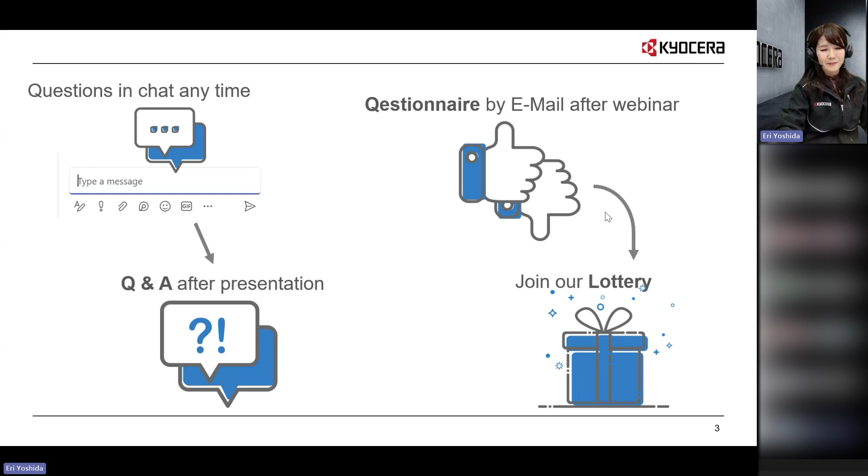Thanks, Eri, for the introduction. Welcome to today's webinar. As Eri clearly mentioned, we would like to talk about drilling today, and in this specific application, I will introduce steel beam machining. But before I start, I would like to give you a short overview of our DRA series in general to see our performance in our lineups.

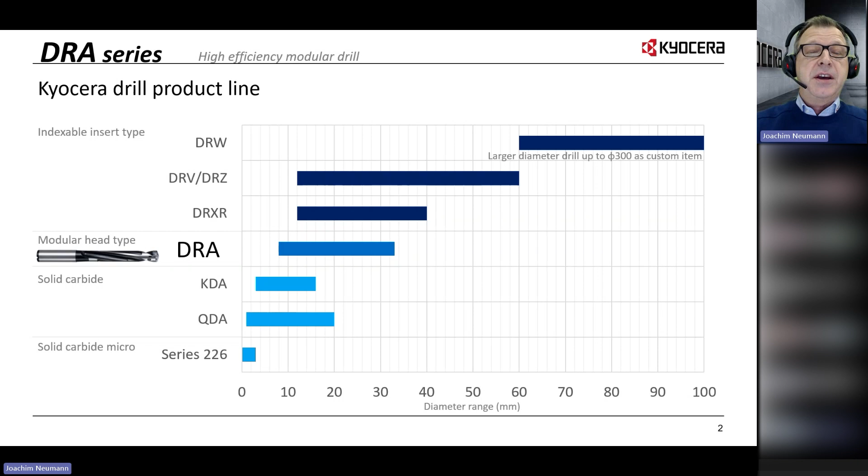As you can see on that slide, we have a huge lineup related to drilling products. Today I would like to focus on the modular head type, which is our DRA. The DRA is taken care of with a throwaway insert. If we talk about the DRA, we are talking about high precision hole making due to the exchangeable tips. It's a modular head type insert, so-called, using a screw clamp system. Some of you may already know our DRC type, which is a self-clamping system.

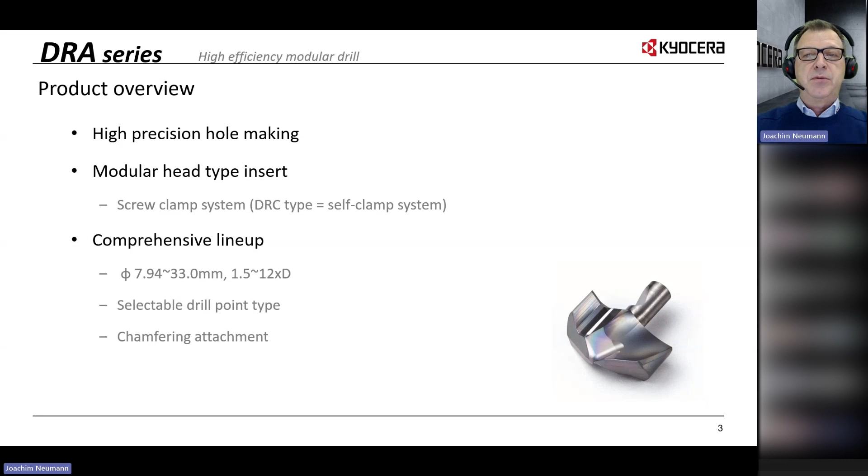At least we have a comprehensive lineup, starting from diameter 7.94 up to diameter 33, and the tool holder itself has a lineup from 1.5 times D to 12 times D. We can select different types of heads, which I will show you in a later overview. And of course there's a chamfering attachment available for a one-shot solution, drilling and chamfering in one shot.

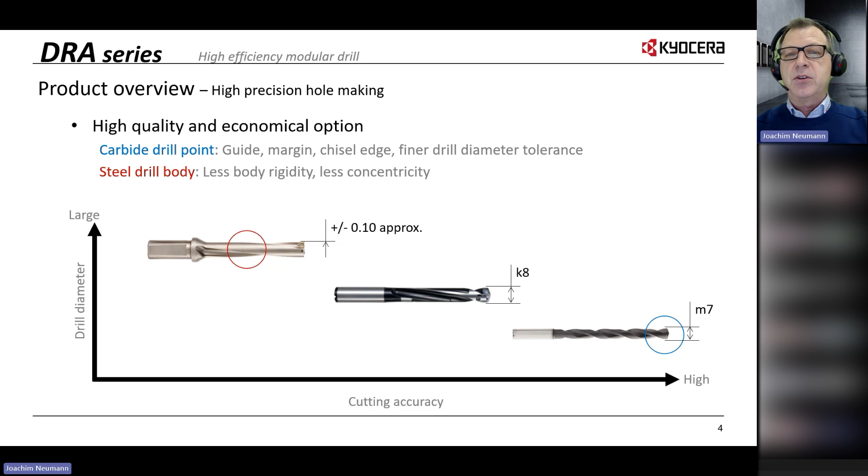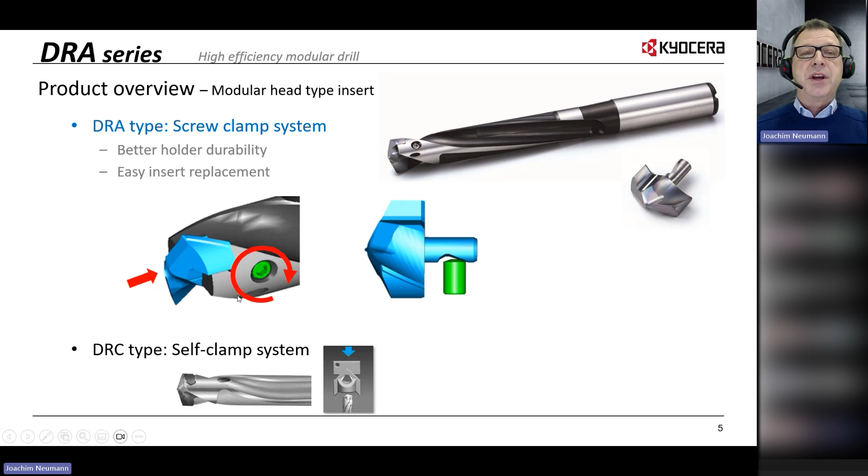Let's go a little deeper into the features of the DRA type. As I tried to explain, this is a screw clamp system, shown here on that slide. Therefore we can expect better tool holder durability, meaning the strength is better, and the tool life becomes longer compared to the former system using the self-clamping system, shown on the bottom side of the picture. And of course it's easy to replace the insert—just untighten the screw, remove the tip, install the new tip, and tighten the screw, and that's it.

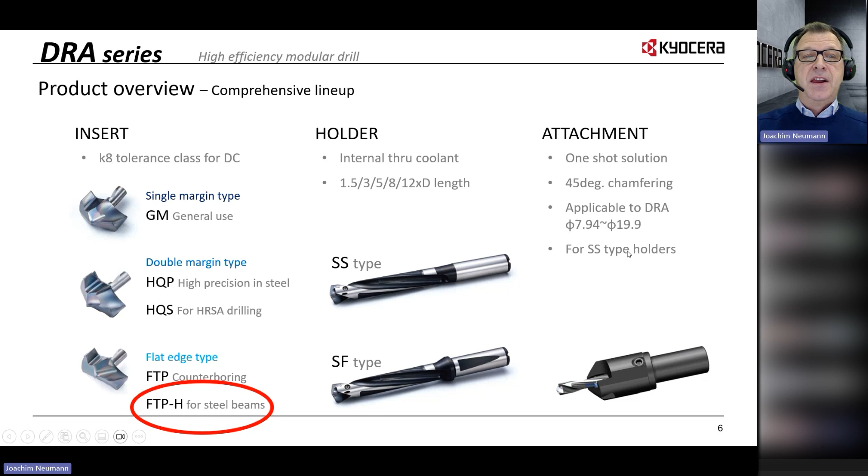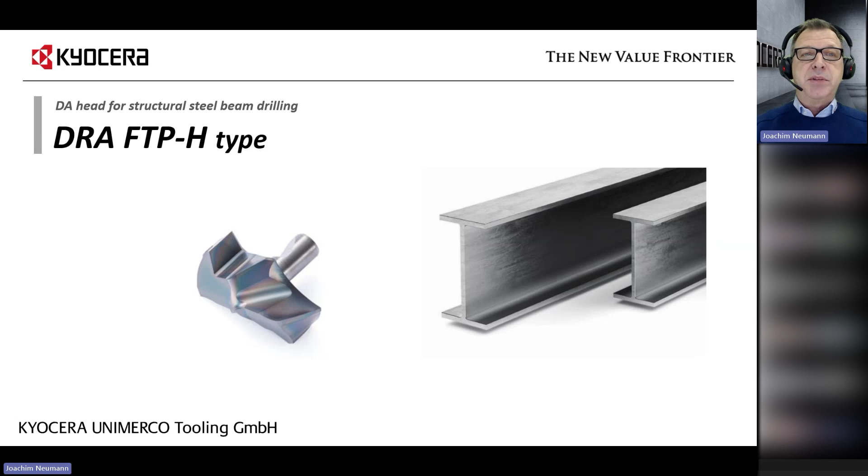So let's go into the FTPH for steel beam machining. This is a specific tip which we developed for a specific market, the so-called structural steel beam drilling. This is a totally new business which we can enter with that kind of application by using our DRA FTPH type. I will explain some more details related to the FTPH type in this presentation today.

Before I start with the features of the FTPH, just some general words about steel beam drilling. If we look at the pictures, you can see it's not a typical situation which we know from our machining centers, which we are normally in front of. So it's a totally different situation.

From the point of materials, these are normally plates, or you have construction steels, the steel beams in T-type or H-type design, and these are normally from sticky material as it is construction steel. So the material shape is mostly plate or square pipe. And of course, the depth of hole is normally not so deep—around 15, 20, or sometimes 40 millimeters.

So normally we can use 3 times D drills, but due to some specific clamping situations, we sometimes need 5 times D drills as well. On the right side, on top, you can see the picture of the chips—longer chips which are hardly evacuated cause recuts. This means the drill will bite again into the chips; it's so-called chip biting, which is a little bit difficult.

As you can see, maybe on the next picture, there are some dedicated machines—gantry machines specialized for these kinds of industry. Normally we have a low rigid clamping situation, or sometimes you find no clamping at all, meaning the workpiece itself just stays in position due to its weight.

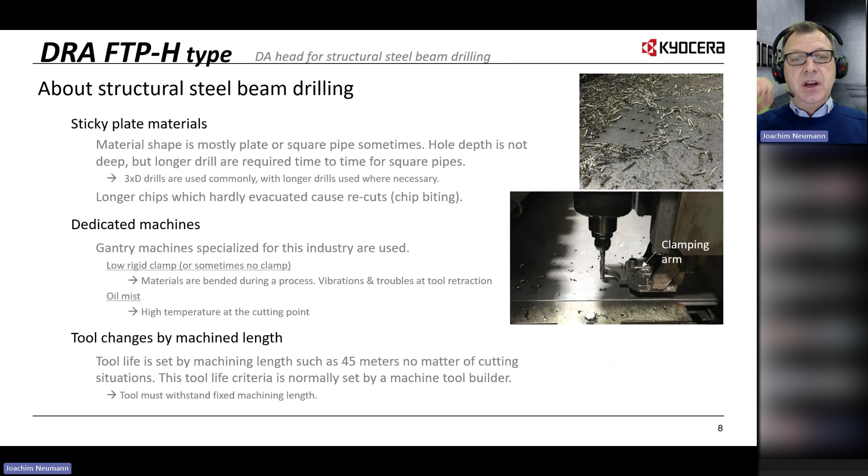So let's go into the information about which kind of machines we can expect for that kind of business. As I tried to explain, this is a totally new business which we can enter—not an ordinary general shop floor. We can find these machines in steel beam machining, for the construction of shop halls or whatever, as we will see on the next page.

Here we're talking about specific machines like FICEP, like the CMA, or on the right side, the Peddinghaus machines, Voortman—well known in the Netherlands—or Kaltenbach from Germany as well. These are specific machines, and as you can see, the shape is totally different compared to the machining centers which we know.

At least there's a machine which is mainly taking care of cut-off, for cutting the steel beams, and then we can find, for example, some additional drill units which take care of hole making or tapping as well.

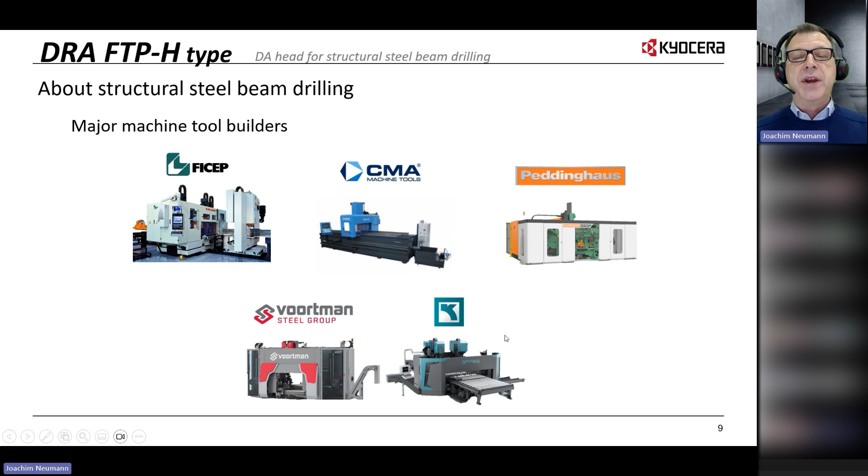So the parts which should be machined on that kind of machines are just an overview here in these pictures—it's in the steel hall structure, we can find that. If you look into your shops, or if you are in front of sales or application and go to the customers, you can find the typical steel hall structures, just open your eyes. This is our business for the FTPH steel beam tip, this kind of business we would like to enter with our new FTPH drill tip insert for the DRA.

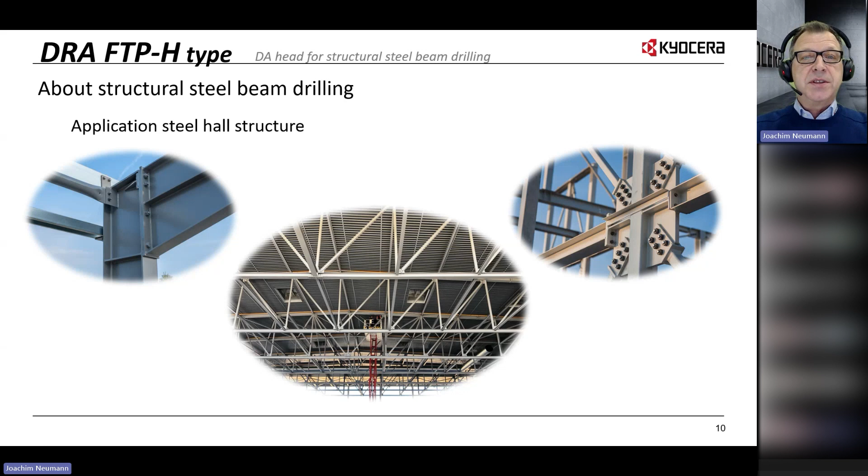For that, of course, we need some specific product features and benefits. At least it's a reinforced geometry, so therefore we expect good and stable tool life. You can see on the picture on the right side that we have a specific chamfer—even the chisel is a specific chisel to get good centering. And one important thing is the 70-degree back cut.

It's shown here, so then we have less trouble if we retract the tool. Maybe there is some deflection from the point of the workpiece, or maybe some other situations where we have deflections, and due to the chamfer, there's an easy retract action given for the drill spindle. So though we do not expect any damages on the tip himself.

And of course, for the cylindricity and for good support, we are using a double margin. And as you see on the picture, it's a 180-degree edge angle. So therefore, we can expect, due to our design, short chips. It will be shown later, you can see that in some nice videos.

But especially here, as we are using 180-degree compared to the conventional 140-degree drill tips, we can save time as the travel distance becomes shorter than the conventional tools. So here is a big impact for increasing productivity for the steel beam application itself, as we have less travel distance compared to the existing systems in the market.

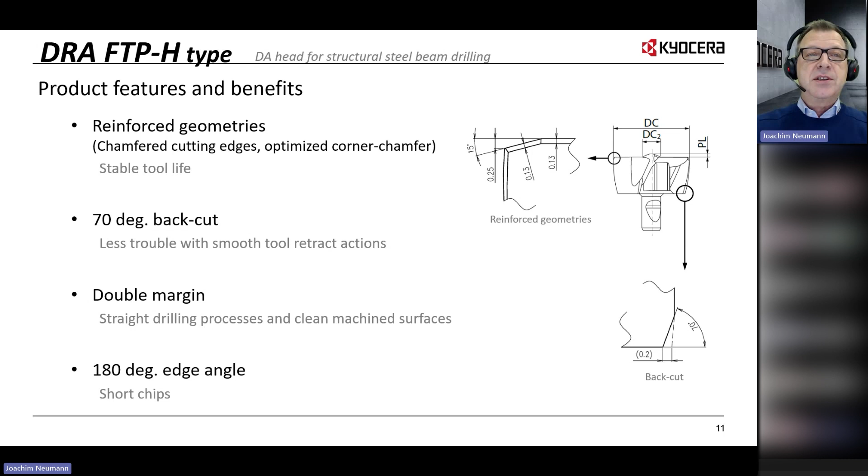So these are the features of the DA tip, and just how they are working, I would like to underline on the next slides. Here we can see some cutting data which we evaluated, and we would like to simulate an interrupted cut. So if you look at the picture on the right side, we are drilling a hole into an existing through hole to give a situation like an interrupted cut.

And if we look at the pictures, you can see that we expect shorter chips on the left-hand side. This is our DRA, so-called DA tip, in diameter 26 with our FTPH. We are using our PR1535 grade, which is the first recommendation for that application. And of course, it's a through hole in construction steel, which is ST52.

And we are using, close to our recommendations, 80 meter cutting speed with a feed rate of 0.2, at a depth of 25 millimeters. And in this case we used internal through-air cooling, and we made 12 holes. You can see clearly the differences against our competitors, which we can find in that market.

The chip shape is totally different. Shorter chips are expected. And if we look at the surface of the hole itself, you can see that our competitors are creating chattering marks, which come from the different rigidity of the tool holder itself, and of course the design of the tip.

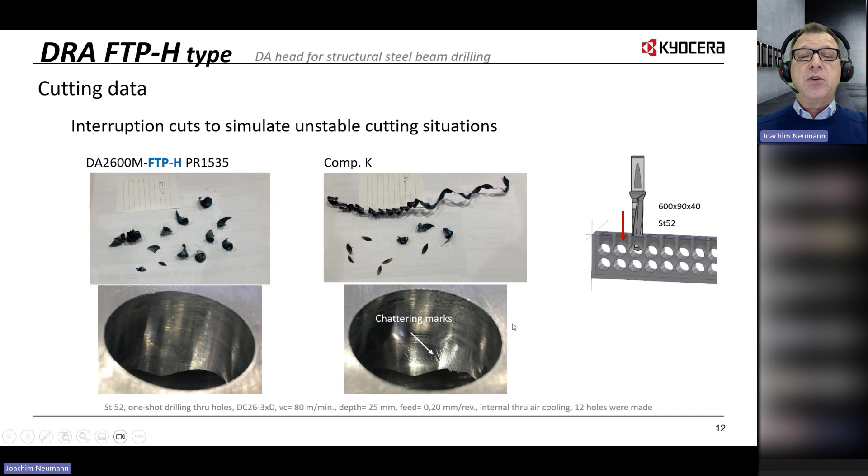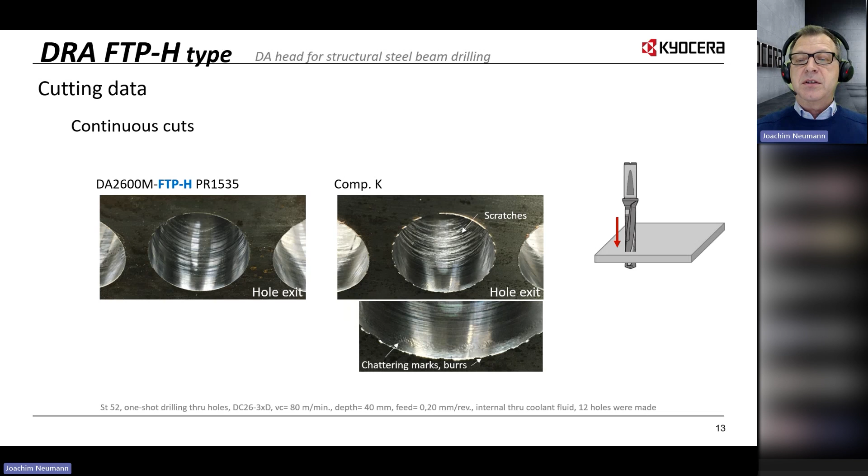So of course, if you would like to utilize our DRA with DA tip FTPH, you need some information on how it should be used. So therefore, you can find here our recommended cutting conditions. The lineup is close to the information which you can find here on this picture.

From diameter 14 to diameter 26, we are always using this as our starting recommendation with a cutting speed of 90 meters per minute. And of course, the feed rates, depending on the diameter, start from 0.18 up to 0.22.

If you're drilling thinner plates, which are more unstable, please reduce the feed rates in this case. Or if you have support by oil mist, the quantity differs from machine to machine, so even here you can check the color of the chips to see if the cutting speed is right.

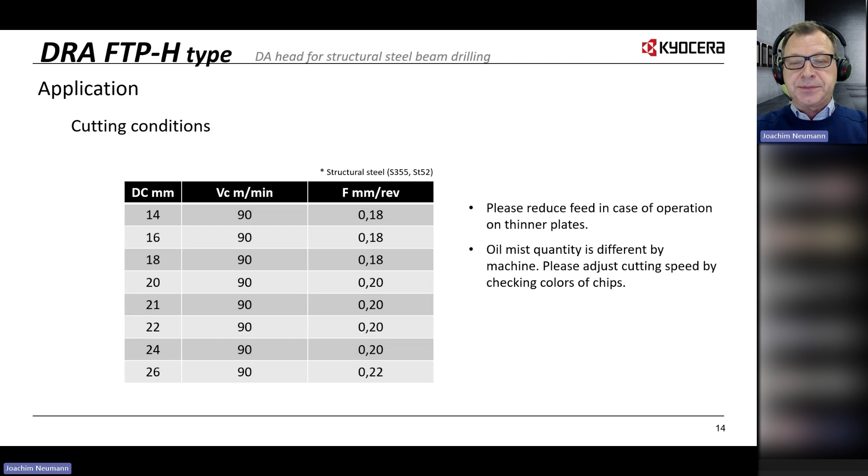So from the point of strategy of the DRA FTPH type, if you are a technical consultant, we would like to open now new business for you, as we have to open our eyes to get that new business, not just the standard customers which we support day by day. So this time we are looking on the right side and the left side to find these specific construction shops where we can find these specific machines, and here we should enter. And why should we do that? Because the performance of the DRA tip is really, really good.

As a technician, an application engineer or a well-skilled technician, you can give customers support which normally is not given to them by our competitors. So this is a good point for you to open new business.

In some cases, if we have unstable machining and we caused problems with our existing tips like GM or FTP due to pull-out, we can improve that with our FTP-H type as well. Or in cases of low rigid clamping, thin workpieces, large overhangs, we can switch from our standard geometries to the FTPH type.

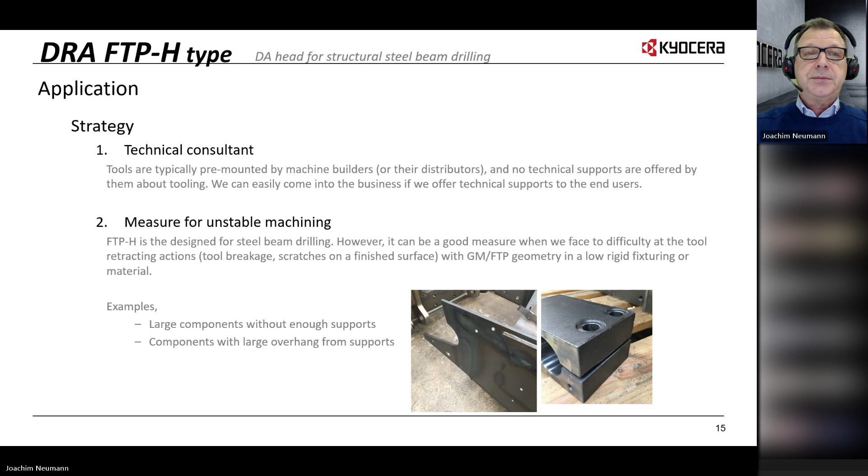To underline our good feeling about that product, I would like to support today's presentation with some nice videos, and I hope the sound is running as well.

This is a test trial done by one of our customers on a Kaltenbach machine. You can see the machine on the top right of the presentation slide. This is the machine where the DRA was used, and of course it was used against our competitors' products. In this case it was Ceratizit, or you can find the same product in the catalog from WNT.

You can see the performance of the chips in the picture here. FTPH in diameter 22, used with extensions at an overhang of 280 millimeters. It was S235 steel plate. Cutting speed in this case was 110 meters per minute, feed rate was 0.3 per revolution, at a depth of 20 millimeters in a dry condition.

So just have a look at that nice video. Okay, now it's working. Here it's quite easy to see the difference and to hear the difference.

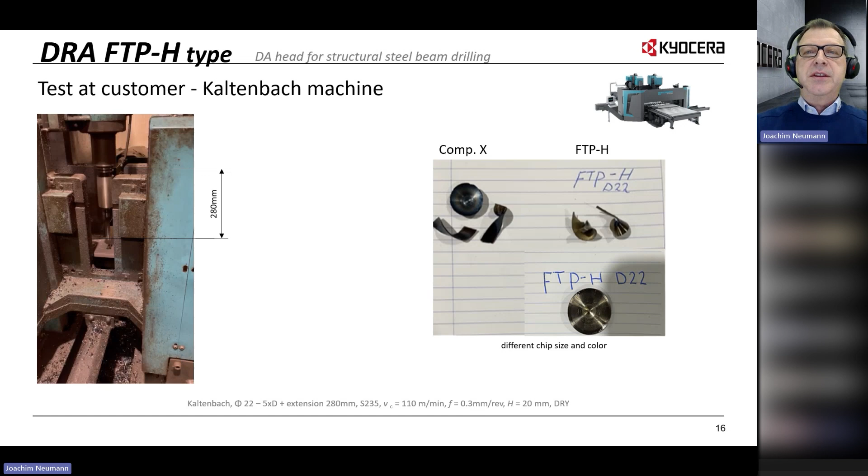I think it's quite easy to recognize that this business is totally different compared to our existing daily business. You can see from the point of positioning, clamping, and even the style of the machine it's totally different, but the performance of DRA with the FTP-H type is really good. Even with an overhang of 280 millimeters, it works perfectly, with really good chip control, and the customer was satisfied.

On the next slide, I would like to give you the opportunity to join the video which was done on a Peddinghaus machine. This is a specific machine designed just for that kind of business, for steel beams. Here we used a cutting speed of 55 meters per minute at diameter 22, a 5xD drill.

This time the workpiece is S355. The feed rate is 0.3 per revolution, and the depth of cut is 16 millimeters in a dry condition.

If you look at the right side picture, you can see the chips from our competitor's product, so-called competitor K - it's easy to imagine it could be Kennametal, the KenTip system - and you can see the chip shape is totally different. Of course, in this application the drill needs pecking cycles as well, meaning a short stop every 2.5 millimeters to break the chips, which you do not need for the FTPH. So even here, enjoy that nice video.

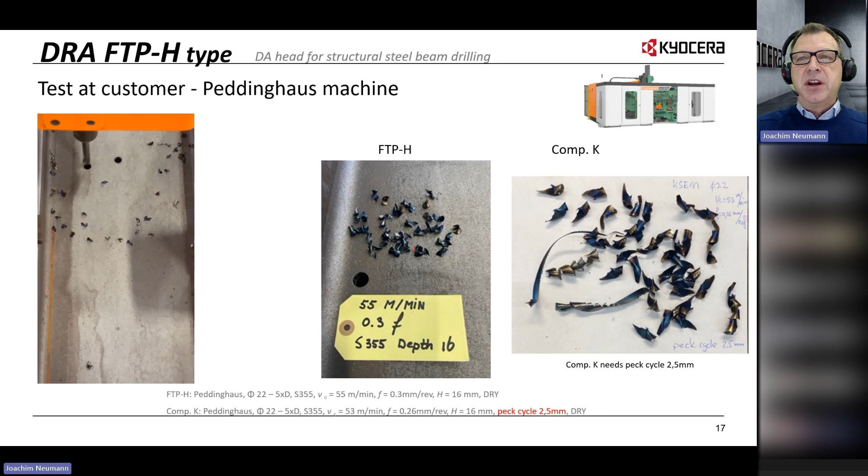On the next slide we will see a test from a customer on a FICEP machine. This is a big plate, which I think is used for bridge building, so it gets a lot of holes. Here it's a diameter 16 FTP-H type, and it's an S355 bis material.

We used a 90 meter cutting speed with a feed rate of 0.16, and the depth of cut was 15 millimeters in dry condition. The customer had previously used a standard Kennametal U-drill with inserts, so the cutting conditions are a little different compared to our DA tip.

For that comparison it was a 120 meter cutting speed with a feed rate of 0.04. Here we could improve productivity 3.4 times compared to the existing product from Kennametal. So even here, enjoy the video.

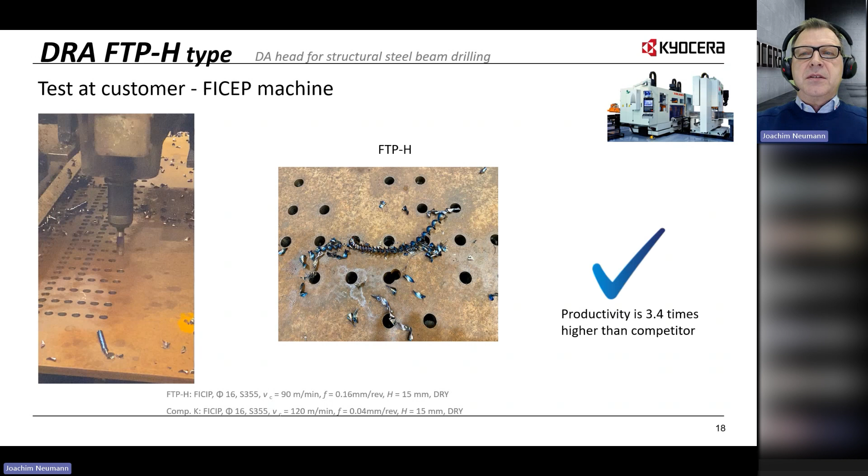So finally, the last video file, it's a test at the customer here. We would like to figure out the unstable fixture. The clamping situation is quite weak, but even here we received a really good result by using our FTPH from the point of chip control, tool life, and even from the workpiece point of view for the next step of machining. So we have less burr on the hole exit compared to the existing products. And here we used 80-meter cutting speed with a feed rate of 0.13 in an unstable clamping or fixture. Enjoy as well.

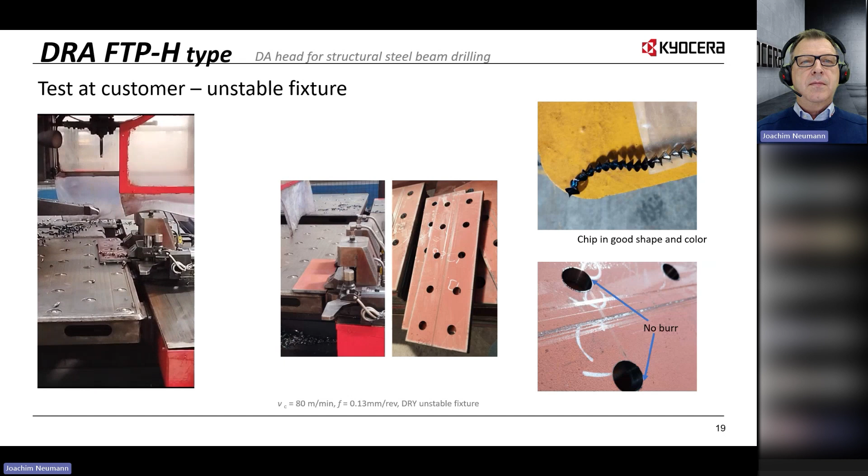Okay, so from the point of lineup, after that nice video, this is not the same full range which we know from the GM tip, or even compared with the existing FTP lineup, but this is related to the required hole sizes, which are normally fixed and limited in this industry. So we are starting with diameter 14, 16, and 18, diameter 20, 21, 22, 24, and diameter 26.

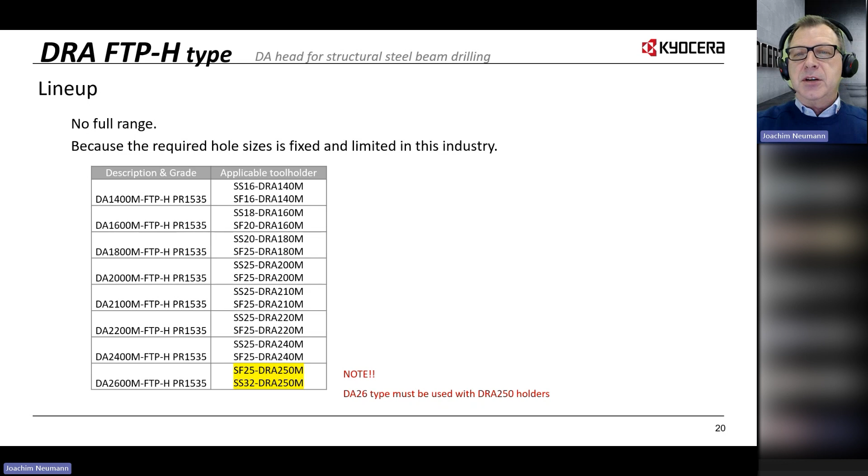Please remember, if you would like to use the DA26, which is the DA2600M, then of course you have to use it on the DRA 250 holder, which is marked yellow. So I hope I could give you some interesting information about our FTP-H type for a total new business for steel beam machining. And yeah, I hope you enjoyed the presentation, and I would like to hand over now to Eri.